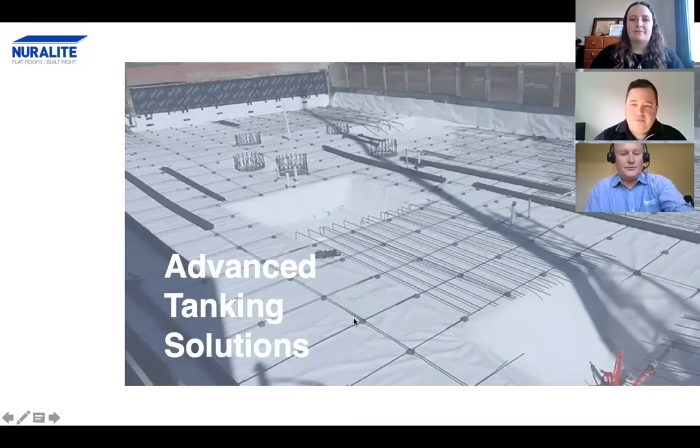Okay, so I'm going to hand over to my first guest, Lucy, and she is going to begin the session with what is tanking and why do we need it. Lucy. Yeah, so hi everyone. I'm going to run you through the importance of tanking, how we choose a suitable product, and key issues we can have on site even if we do select the right product. So the importance of tanking.

So first of all, tanking is a method of preventing water ingress into a building by creating a completely impermeable waterproof barrier on a building exposed to moisture below the ground. There are a number of reasons why we should tank our below grade space. So firstly, and most obviously, it prevents water ingress into the basement space, which is primarily caused by groundwater. So if your building is located above the water table, there is still a risk of water ingress through irrigation or rain events as the water recedes to the natural groundwater level.

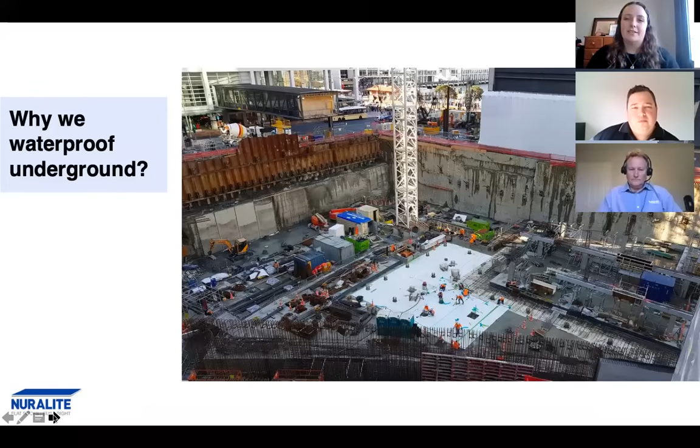So tanking also helps to prevent the ingress of rising damp, which is moisture from the ground rising up through the building through capillary action. Moisture ingress into a building can start to damage the interior space. It can lead to staining on your walls and delamination of your interior linings, causing damage such as paint bubbles or lifting of your flooring finishes. It can also impact the overall durability of your structure.

An increase in the moisture within the building can increase the interior humidity and lead to dangerous mold growth, which can cause a number of health problems from coughing to skin irritation, as well as damage to your mold sensitive materials. So there are a number of different types of tanking products, but they all aim to do the same thing, which is keep water out of your building to protect the interior space and protect the people inside from undue dampness and mold. So yeah, there are a number of tanking products, from sheet membranes to liquid membranes to swelling membranes. So how do we choose which one is the most suitable for our project?

To do that, we have to ask a series of questions. So where is the building located? Is it within the water table, and therefore will there be hydrostatic pressure acting on the building? Will the site water be contaminated? Will the soil be contaminated? Do we have access to the basement walls before or after concrete placement? Is the basement structure cast or precast? Will the membrane be pre-applied or post-applied to the structure? And is there any differential settlement below the structure?

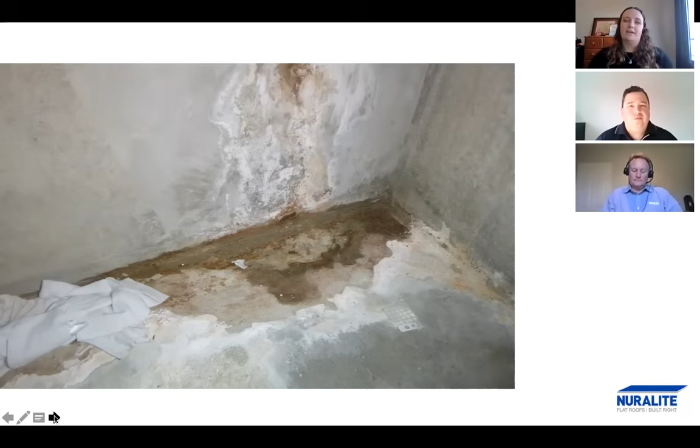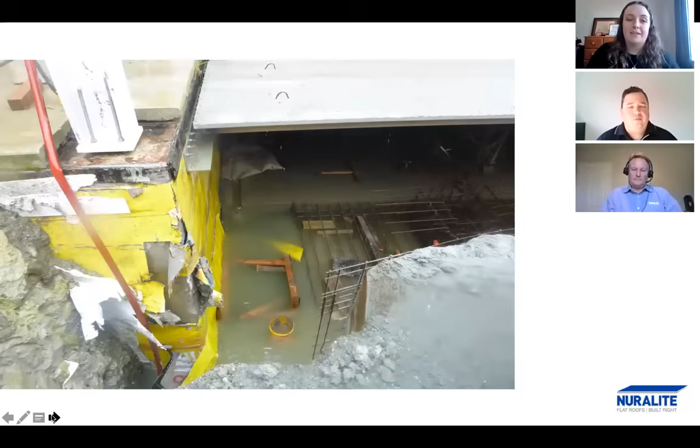So while it can be a relatively straightforward task to design the tanking solution on paper, it doesn't always mean it will be installed perfectly on site. A few issues I have run into while on site include site water, as you can see on the slide. So one example of this is a project I was working on down in Wynyard Quarter. The site was not dewatered and we were battling through a very high water table, king tides and Auckland's rainy season, all with a moisture sensitive membrane. So not only was the site water on the membrane, it was also at times below it, causing big water bed type features around the site.

So at the beginning, the site water was a big issue. We had to replace some of the materials as they became oversaturated. And eventually 2 water pumps were added to the lowest corners of the site to protect from the site water.

So another issue that I've seen is membrane folding during the concrete placement. Due to the weight of the concrete being poured, the membrane can be pulled down and result in folded membrane. A lot of tanking membranes require confining pressure to be effective. So these folds require remediation or complete removal. For this, we had to develop a new detail for these folds.

And finally, and probably the biggest one, is damage to the membrane. As the membrane is placed over the whole slab where people are walking and working, the membrane is often damaged. It can be difficult to sometimes pick up on this damage if proper QA of the installed membrane is not provided.

So to summarize everything, providing a tanking membrane and selecting the right product is very important to protect your below grade interior space and the people that inhabit that space. But also following your design through construction will ensure the product performs as intended over its design life.

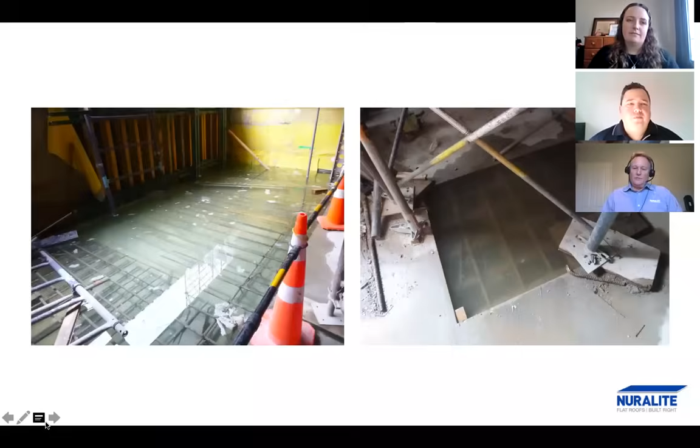Okay, so thanks, Lucy. And now we're going to move on to Marius. Marius, you have a view on a few issues. What can go wrong and what can make it go wrong? Over to you. That's right, Mark. Just following on what Lucy had to say about site conditions.

When working with Nuralite, we look at a 3-prong approach to selecting our tanking materials. Whether you're going to have a site that has no hydrostatic pressure, it's not sitting in a water table, water flows away from the site, it's a very low risk site. In a situation like that, you would use Bituthene 3000 on the walls, which is a self-adhesive membrane. This would protect the building from any rainwater getting into it, and they could just run with a plain DPC under the slab itself.

The second approach would be looking at more of a waterproofing level of protection. That's when you're building on a site where you do have groundwater running towards the building in heavy rain conditions. For that, you would look at a more secure torch applied system, the Nuraply 3PT and the 3PTM, which would go underneath the slab.

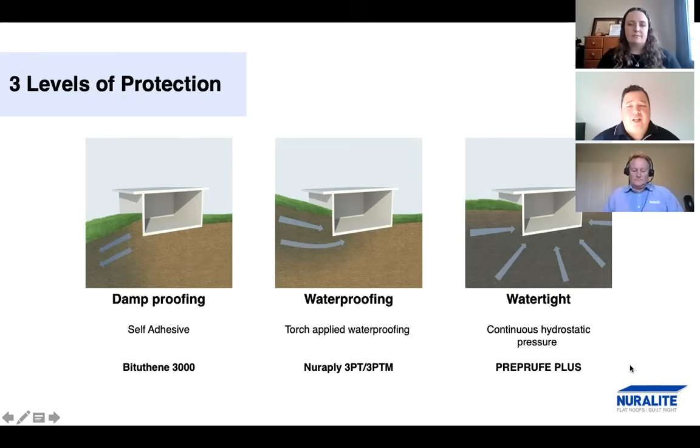Our third approach would be for a complete watertight basement. These are generally for high risk situations, basements that are exposed to continuous hydrostatic pressure. For something like that, you would look at the Preprufe Plus, which is our top of the line product and can withstand high hydrostatic pressure, fully bonds to the substrate, and gives you a complete watertight seal of your structure.

As Lucy mentioned earlier, there are a number of different tanking products available on the market. Choosing them, you've got to take into consideration the performance characteristics of these products. We have a table which we'll look at for the different types of membranes. You get your bitumen torch applied, you get your bitumen which are just laid underneath a slab and bond mechanically with the aggregates in them to the concrete that's poured. You get your self-adhesive membranes, such as the Bituthene 3000, which has an HDPE facer protection layer on it.

You get your thermoplastic membranes. With those, you get 2 types again. You get the ones that have a chemical adhesion that bonds to the concrete, for example, the Preprufe 300. And then you also get thermoplastic membranes which bond to concrete mechanically, as they have fibers on one side, giving you a mechanical full bond.

You then also have your sodium bentonite membranes, which also have a mechanical bond with the fibers on it, and your PVC membranes, which are generally loose laid over your site and welded onto PVC water bars around it. They're generally just loose, and they form compartments. They usually refer to them as a compartmentalized system.

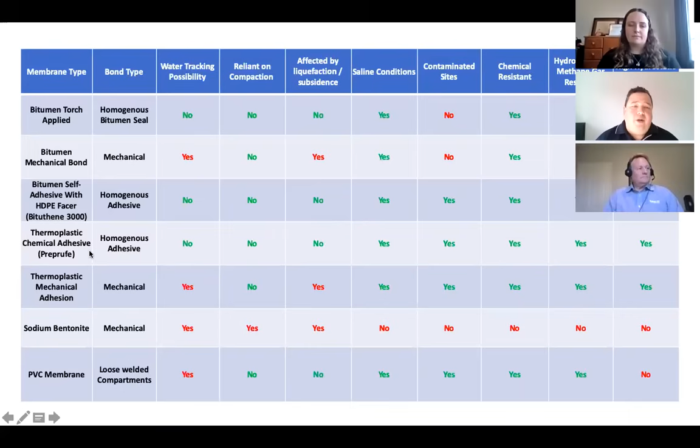To give you an example of what the Preprufe and Bituthene 3000 products are, this is the Bituthene 3000 system installed on a site in Auckland. It's a high-density polyethylene membrane facer. It's made up of an SBS, which is a rubberized bitumen membrane, and it is cold applied and self-adhesive.

It's a preference to use on sites, especially when you're below grade and you've got tight compaction, as there's no need to use a torch or a flame. It's cold applied, it goes on quickly, and it gives you high confidence in the performance of the system.

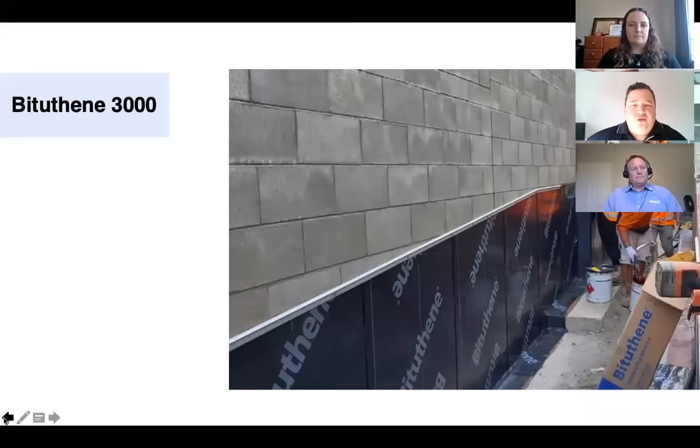Marius, on that, are there any temperature issues for these types of products? They can be installed at certain temperatures below grade, so generally, if it goes below 5 degrees Celsius, you wouldn't install it. It'd be a bit cold on site. What would be the options? If you get really low temperatures, we could possibly look at using the torch applied membranes then. Right, okay, yeah.

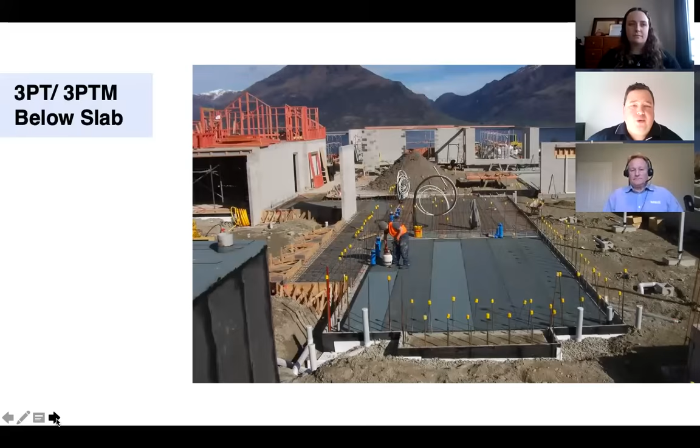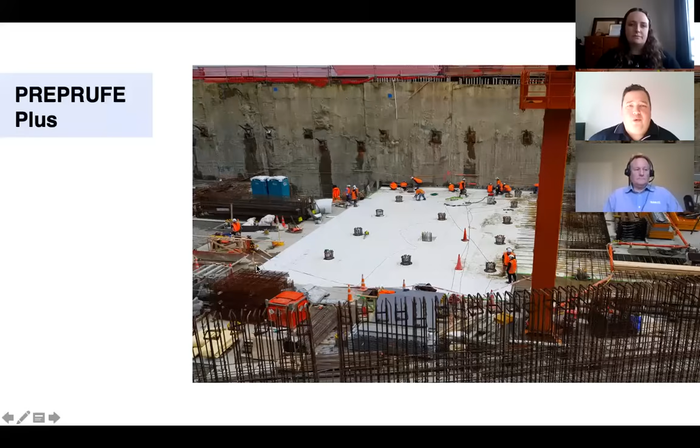The Preprufe system has excellent details to deal with piles. It has excellent details to deal with any penetrations in the system. It has a full system of components to go with it. And it is used in sites where you have a high risk of water getting in, also sites that are high risk of chemicals or sulfates or hydrocarbons.

Getting a bit more into the Preprufe membrane itself, this is just a bit of a diagram, and the following slides will lead on from that, showing you exactly what the system components are. The Preprufe itself is made up of a high-density polyethylene membrane, which then has a pressure-sensitive adhesive layer on top of that, which helps bond to the concrete. That is then protected by an acrylic layer over the top.

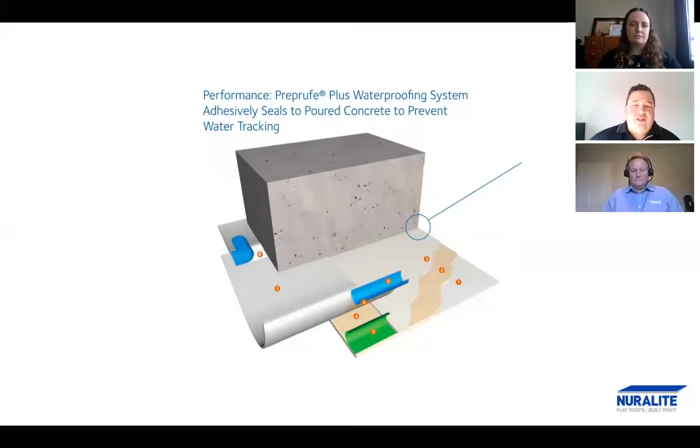This acrylic layer helps the membrane protection during work on site, so the contractors can go and lay the membrane out. It then protects the membrane from the steelies coming to put their rebar in, the reinforcing, following works prior to the concrete being poured.

A brief diagram here showing exactly how the Preprufe adhesion system works. As the concrete is poured onto the site, it passes through the first protective layer, which then activates the adhesion layer underneath it. The heat generated by the concrete causes a reaction. It's a pressure-sensitive adhesive, which bonds to the concrete as it cures, and the concrete will then literally grab the Preprufe membrane and pull it into itself. So it becomes a homogeneous full seal and an impenetrable barrier.

Is that controlled by the limes and the content of the concrete that creates that heat, Marius? It's just a curing action in the concrete. As concrete cures, it naturally generates heat, and this generation of heat assists with the bonding. That is why it's critical to leave any sort of protection layers on for the full concrete cure period.

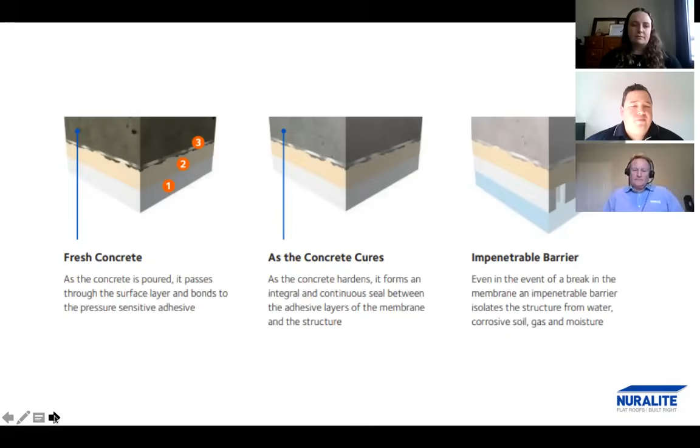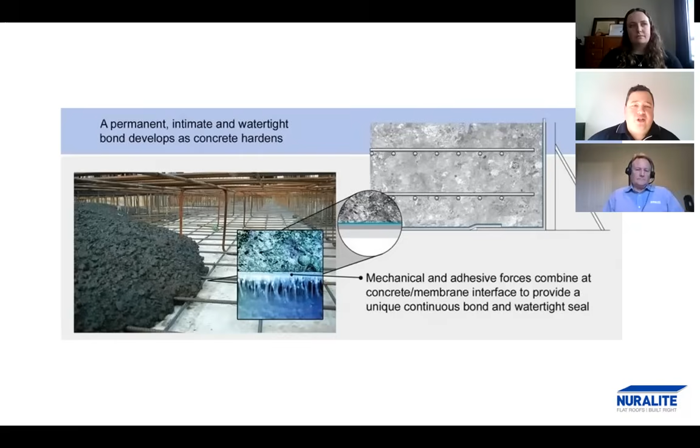This is another demonstration just to show you from a site level. Here you have your reinforcement placed in. The concrete is being poured onto the Preprufe membrane. And having a look at it from a microscopic level, you can see on that diagram how the Preprufe itself actually bonds to the concrete and forms a complete homogeneous seal. This seal will prevent any water tracking between the membrane and the concrete, should there by any chance be a penetration in the membrane that was not picked up prior to the concrete pour.

Now, looking at the risks of not having a fully bonded system. Obviously, you get two types of bonds. You get a full mechanical bond and you get a full homogeneous seal bond. Mechanical bond, unfortunately, still allows for water to track between the membrane and the substrate.

With this type of breach, they can go in and they can do a crack injection. It will repair that section, but unfortunately, the water will look for the path of least resistance, and it will move along to the next crack in the concrete, and you'll just have to continuously crack inject and do repairs.

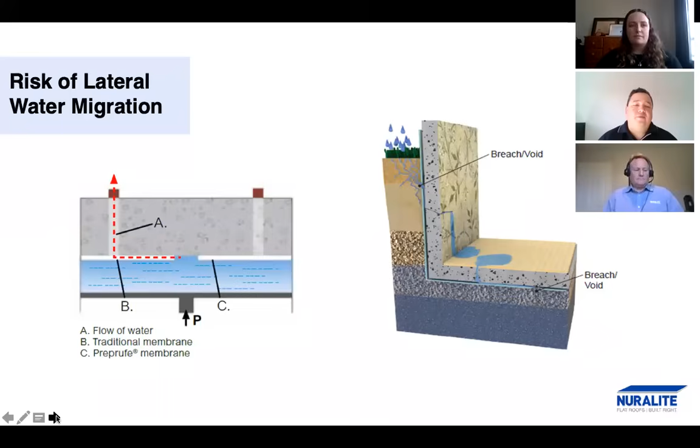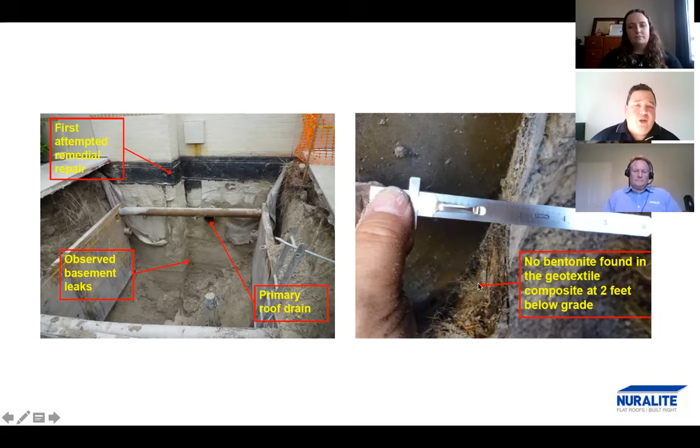What happened was the roof drain was actually pumping water out every time they had a major storm. This resulted in the sodium bentonite granules, which are in the geotextile fabric, being completely washed away. And with that happening, it allowed water ingress into the basement.

In this site, it didn't have the required compaction, and the bentonite was pushed away from the substrate, resulting in constant leaks.

Sorry, Marius, just a quick question. Is compaction a big issue in New Zealand? Compaction is a big issue in New Zealand. Unfortunately, in New Zealand, we do a lot of brownfield building. And when you're building on a site and you're reusing that site, you can go in, have your basement constructed.

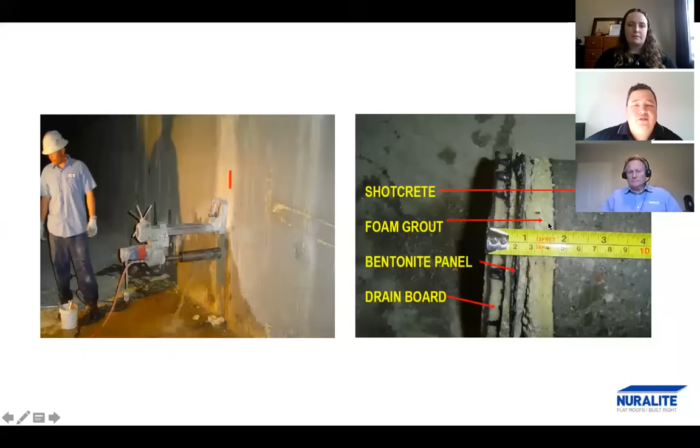Again, on this picture, you can actually see the amount of the foam grout, the crack injection resin that was used to carry out the repairs on the site. Yeah, and that's about it. That's your bit. Thanks, Marius. That's a great overview of some of the key areas when you're considering your waterproofing options.

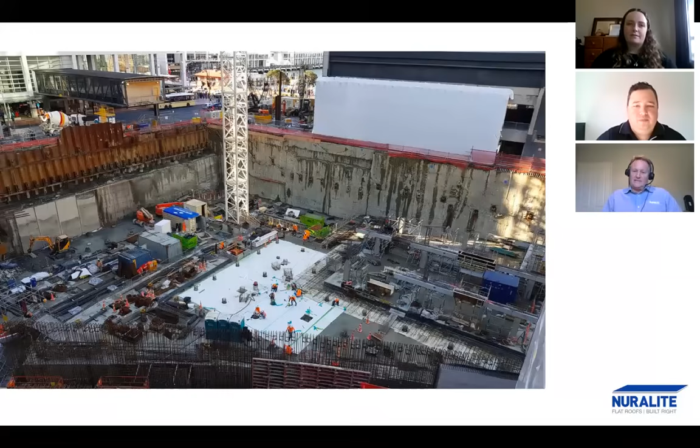I have a question for Lucy. Lucy, the challenges around tanking can be unintended consequences. They can be things like penetrations coming through, pipes and rebar and all these things. Tell us a wee bit about the thinking behind how you deal with those things. So you tend to deal with penetrations at the design stage, but we would have a typical penetration detail that details the penetrations with accessory products to add that penetration to the tanking line.

Yep. Okay, great. Some of the challenges around building sites can be things like tree stumps and roots that will grow through. What is the thinking behind that? That's not something I have come across yet, as you would have to remove the trees or plan for them before you got into construction. Yep. Okay, so making sure that we have a clear pathway, but also, over time things do grow.

And Marius, we've got a product that may be suitable in that space. Yeah, we generally use Nuraply 3PG membrane in that space. The 3PG would have a root inhibitor in it, which would prevent the roots from penetrating the membrane. The main problem you have with roots penetrating is not so much the membrane itself, but it's more to do with the laps. The roots will generally find their way through the laps. So it's also a point of reinforcing those laps on site.